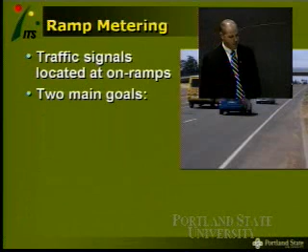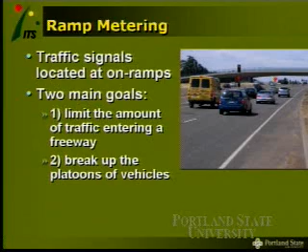So ramp meters, and for those on the web, the images, there we go. Ramp meters at their basic level are traffic signals at the end of freeway on-ramps. They have two main goals. One, to limit the amount of traffic entering the freeway, especially as the freeway nears capacity, to keep the freeway operating below capacity. And two, to break up platoons of vehicles as they're entering the freeway. Generally, if they've been discharged from an upstream traffic signal, the ramp meter intends to break up the platoons of vehicles to space out the vehicles entering the freeway.

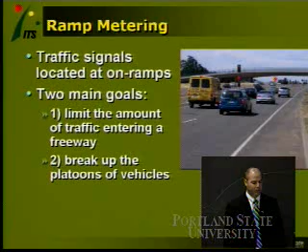This is an old operational strategy for improving the performance of freeways. Many studies have shown the potential for ramp metering to improve traffic flow, traffic safety, and air quality by reducing congestion and fuel consumption. It also has a side benefit of managing demand by discouraging short trips. If the appropriate ramps are metered, it will discourage short trips on the freeway, and people may take the arterial instead. So the freeway should be used at its capacity for longer trips.

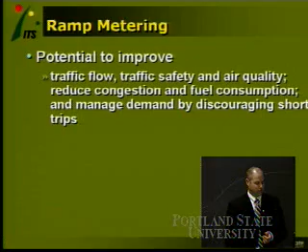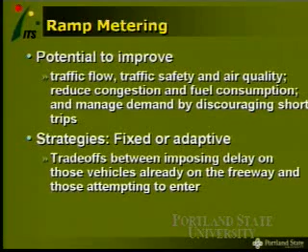There's a lot of work in optimal ramp metering strategies. They come in two kinds: fixed, where the metering rate, the amount of vehicles let on per time, is pre-decided by some historical pattern, so the timing is fixed and independent of the traffic conditions on the freeway. More modern systems are adaptive, meaning that when the meters come on and what rate they allow vehicles to enter can change depending on freeway conditions. So if it's a weekday with light traffic, the meters may not come on until later, and then they may meter at a higher rate, allowing more vehicles onto the freeway.

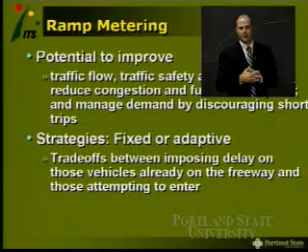So any ramp metering strategy really is a trade-off between imposing delay on vehicles trying to enter the freeway and those vehicles on the freeway. If you make the metering restrictive, you're going to build large queues at the on-ramps and impose delays on those vehicles while keeping the main line with less delay. If you allow more vehicles onto the freeway, eventually it's going to cause congestion and impose more delay on the main line. You're also usually limited by how much ramp storage you have. A particular ramp may only hold so many cars in queue before it backs up into the arterial system and causes other problems. So it's a balancing act between those three parameters.

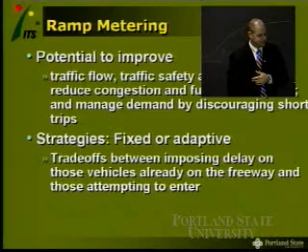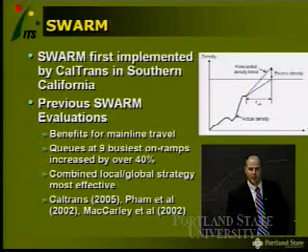Ramp metering started in Oregon in about the 1980s. It has been a fixed-time or pre-timed system until relatively recently, which was the focus of this project. They elected to implement an algorithm called SWARM, the System-Wide Adaptive Ramp Metering, an algorithm implemented by Caltrans in Southern California. The Caltrans evaluations have been in-house and not that extensive. They found benefits for mainline travel, but they also found that the SWARM algorithm was fairly restrictive, and the queues at the busiest on-ramps increased by 40%.

The SWARM algorithm competes between local optimal metering at the ramp and metering looking over the corridor in a more global sense. So it's evaluating which metering is appropriate based on local conditions, but also on the freeway conditions, and then it selects the appropriate metering rate.

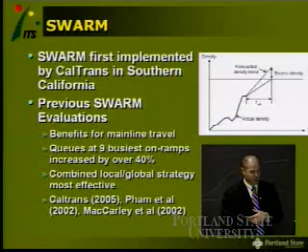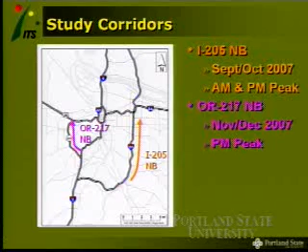So in our study, we conducted a pilot study on Oregon 217 southbound, which helped us set up the parameters for the remaining study. I'm going to talk today about the 3 other corridors that we evaluated in the full-scale study. So we looked at I-205 northbound in September, October 2007, and we looked both in the morning peak and

the PM peak. And we looked from the Gladstone on-ramp, which is down here, to the Division exit. So that was the extent of our evaluation on 205. And then on 217, we looked along the whole corridor, but we only looked in the afternoon.

So our approach was they ran the meters for 2 weeks in the fixed time or the pre-time mode. We were collecting data all the time through Portal, which is our regional transportation data archive. So everything that was happening on the mainline freeways by the detectors was being archived there. Then they switched over and ran the meters for 2 weeks in the swarm mode. So we went through the data pretty thoroughly, looking for data quality, weather, and incidents, and I'll show which days ended up being excluded from our analysis on the next slide.

The last bullet was our attempt. When we had done the pilot study, we had analyzed the ramp queues with video. And so there were a number of students that spent a lot of time watching video for the ramps. And we did it, but it was time-consuming and labor-intensive.

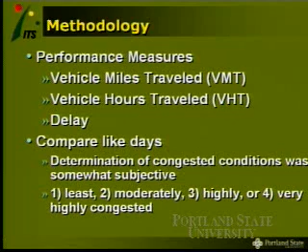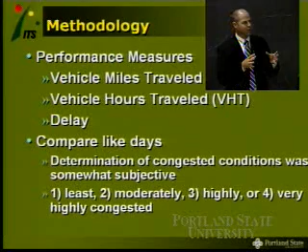So for the performance measures, we looked at the traditional performance measures, VMT, vehicle miles traveled, vehicle hours traveled, and then the primary focus measure that we were looking at was delay. Although we didn't have a large sample, we had 10 days before and 10 days after, we wanted to break the days down and look at how the swarm ramp metering algorithm performed on similar congested days.

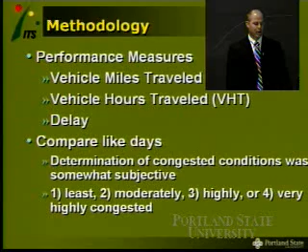So it was subjective, we had a set of criteria that we were using to try and determine how we would classify the corridor, both in time and in space, as congested. And we ended up coming up with these 4 categories of either least, moderately, highly, or very highly congested. And then we looked at the performance of the ramp metering overall in the corridor and on those 4 classifications of the congestion.

So this is just a snapshot of the heart of the analysis data that we used. Again, this is from the Portal Data Archive, and on the x-axis is time from about 5 in the morning to about 8 o'clock at night. The y-axis is distance, so travel is from the bottom of the graph to the top. And the colors indicate the average speed readings from each of these detectors across all lanes.

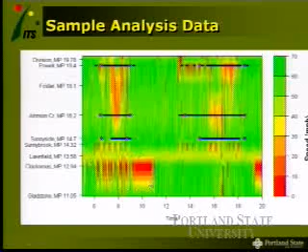So the red speeds are low speeds, green is higher speeds. And this kind of summarizes the data that we used in the analysis. You can see here that this is probably not congestion. This is definitely data quality issues. So when the detectors are reporting low speeds over these large blocks, those were data quality issues.

These other points on the graphic, the purple dots, are the fixed time start times of the ramp meters. So at 3 ramps, we were able to deploy those programmable logic controllers. So at Sunnyside, Johnson Creek, and Powell, we were able to have those devices out there. The purple dots are when the ramp meter came on during the fixed time, and the blue line is when the ramp meter came on during the adaptive time.

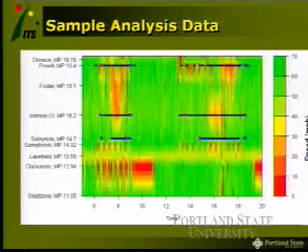So at Sunnyside, in the pre-timed, it came on right at about 6:30. But on this particular day, the adaptive ramp meter didn't come on until much later, about 7 o'clock. And it stayed on longer than it would have in the fixed time. And conversely here, it came on earlier than it would have on the fixed time. So the purple dots are the pre-timed or fixed time, and the blue lines are the adaptive. So that's just a quick summary, a good picture of the data we used in the analysis.

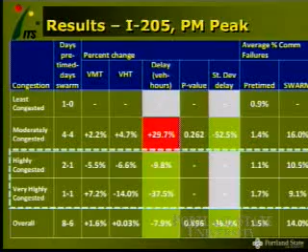So even though the overall corridor had an 8% improvement in delay, the moderately congested time periods, where you would expect ramp metering to have the most positive effect, we actually observed a 30% increase in delay. We did a t-test of means, but because the delay was so variable and the sample so small, only one of the tests in all of these days came out as significant. So dividing the days up into congestion level was more informative and for diagnostics than necessarily route comparison. In the highly congested and very highly congested, in retrospect, we probably should have combined those two. But in this case, the swarm algorithm did better than the pre-time period.

So I don't know why the graphic color is a little distorted. On my screen, everything's red, yellow, green. I guess yellow becomes orange on these projectors.

But this graphic shows, and the legend is cut off, so this is the change in vehicle hours. So this is the change in delay from the pre-time to the swarm period. So the dark red areas are where in space and time the delay on the corridor was worse in the swarm period.

The lighter colors, the green colors, is where the delay was improved in the swarm period. So we use this here to diagnose where in space and time the improvements were. So instead of just looking at the overall corridor, there was an 8% increase and 8% decrease in delay. Where was that decrease?

And so just highlighting these two areas, this is where the swarm did worse than the pre-time. So we wanted to kind of zoom in to this area. And we also made these plots for each of the various congestion levels. And again, it's the same.

For the moderately congested, where there was a 30% increase in delay, down at the beginning of the corridor at the Clackamas Lawnfield detectors, you can see that's where a large chunk of the increase in delay comes. And there was also a little slice here at the Sunnyside, Foster, Johnson Creek area between about 3:30 and 4.

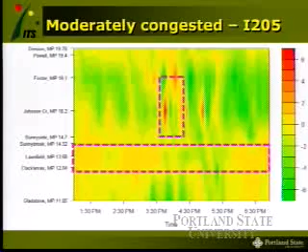So the Clackamas area, we did some diagnostics like this that I'll walk through. And for that ramp metering station, the conclusions are about the same as we came from this one. So the question was, why worse? Why did the swarm ramp metering algorithm perform worse than the fixed time?

So these plots, the pre-time condition are for the three stations, Sunnyside, Johnson Creek, and Foster, and they're on the top row. So the top row is the pre-time condition. The bottom row is the same three stations for comparable congested days. So there are three lines and two vertical lines on each graph except for the Foster swarm station.

The yellow line, this top line, is the observed mainline speed, and it's read off the secondary y-axis, so it goes from 0 to 60 miles an hour. The blue line and the red line are read off the y-axis, and it goes from 0 to 5,000. It's the flow rate in vehicles per hour. The blue line is the mainline flow, and the red line is the metered flow.

So in the Portal Data Archive, for the vehicles passing downstream of the signal, there's a set of detectors, so we were able to measure the flow, the number of vehicles entering the freeway. The vertical lines on each of the plots are the meter on and meter off times. So the vertical lines are the time the meters came on, and then this is when the meter came off. So at Johnson Creek and Sunnyside, they came on and went off. Those are the fixed time.

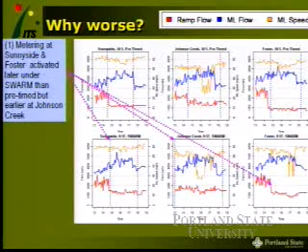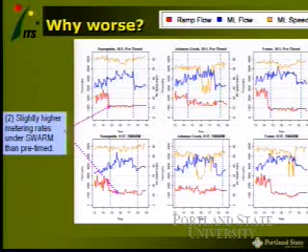So why worse? At Sunnyside and Foster, if you compare that to the pre-time, the meters actually came on later in the swarm condition than they did in the pre-timed. At Johnson Creek, swarm came on earlier than pre-timed. And Dave, this goes to the ramp information. In all cases, we observed, despite what Caltrans found, that they found increases in the ramp queues.

When ODOT implemented the swarm algorithm, they sort of capped it; they didn't want it to be that restrictive. So in all cases that we observed, in the pilot study where we had the video detection, and in all areas that we looked at, the swarm algorithm actually lets more vehicles on the freeway than the pre-time situation. We can look at the VMT, sort of the overall demand, and we did it 2 weeks before and 2 weeks after, and we assume that the ramp demand probably didn't change because the mainline demand didn't change very much.

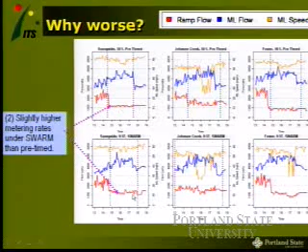We can conclude, but not conclusively say, that the ramp delay had to decrease because more vehicles were getting on the freeway than in the pre-time situation. But in all cases, and I should have overlaid these two for you, if you look at where this is at here and up here, it's slightly higher. The swarm algorithm always allowed more vehicles on the freeway than the pre-time situation.

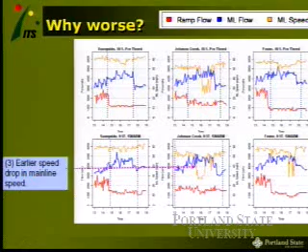And just looking at this graph here, this is Johnson Creek Station, you can see that in the swarm period, the drop in the mainline speed occurred earlier and for a longer duration than it did in the pre-time situation. And granted, this is just one snapshot, but these are sort of the diagnostic tools we were looking at. The peak mainline flow is about that time where you saw the delay space-time change, right where the mainline flow peaks, where swarm is letting more vehicles on the freeway, is sort of where we saw that increase in delay in the time-space window.

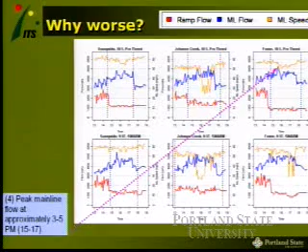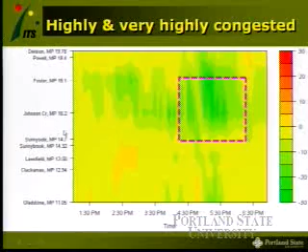So looking at the performance, the highly and very highly congested days where swarm seemed to perform a little bit better than the pre-time situation, doing that same type of diagnostic here, the green areas are in those same stations, Foster, Johnson Creek, Sunnyside, where a big chunk of the improvement occurred. So let's take a look at those. This is the same plot, same three stations, pre-timed across the top, swarm on the bottom.

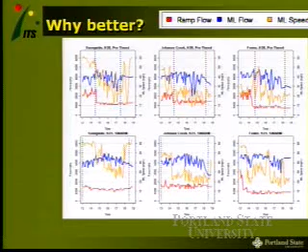And here in this situation, you can see that the adaptive ramp metering system came on at 1 o'clock. That was the earliest ODOT would allow the ramp metering to start. And in this case, on these highly congested days, the ramp metering timing came on at 1 o'clock. At the pre-timed, it's not coming on until 1:30, 2 o'clock, depending on the station. And you can see here that the mainline speeds in the pre-time situation on these very highly congested days drop well before the meters even come on. So the mainline condition has gotten worse before the meters have even come on.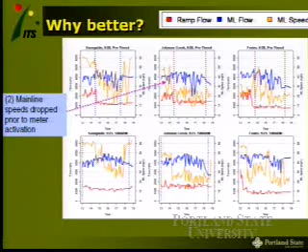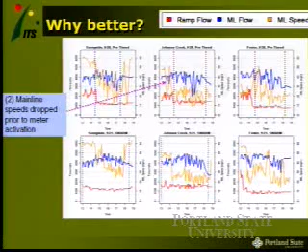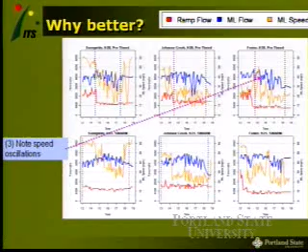But in the swarm situation, the meters were able to start at 1 o'clock. And even though they were allowing more vehicles on, they were able to sort of manage the delay a little bit better because they started earlier. The other thing to look at is, and again, this is just one snapshot from one station from one day, but if you look at the speed information across the top, you see how much more variable that is, the oscillations in the speed, whereas the swarm is a little bit more dampened and a little bit more smooth. That goes to the standard deviation of delay, where we saw an improvement in the variability of the speed or delay or travel time, whichever one you want to look at.

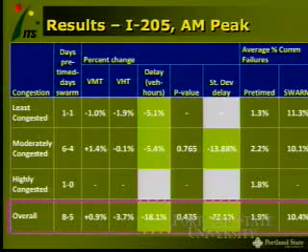So looking at the morning, swarm on 205 did across the board better in all congested conditions, and overall had an improvement of about 20% in delay and an improvement in the standard deviation of delay. And again, just looking at the map where this chunk is here, I'm not going to go through another one of those plots, but what we found

by looking at the diagnostics there was that in the pre-time situations, the meters went off, but there was still quite a bit of ramp demand, particularly at the Foster ramp. So you could see in the plots where the meters went off in the pre-time situation and this big surge of vehicles came on, and you saw a pretty significant jump in delay. But Swarm was able to keep the meters on until about 9:30 or 10 until that demand went away. And so at that particular station, the meters staying on longer actually improved the performance in the corridor.

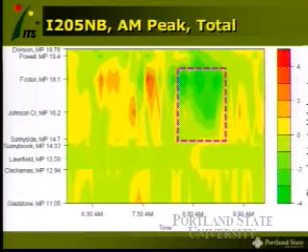So we sort of hypothesize or suspect that it's because, if you know the two freeway corridors, 217 is a narrower corridor, a narrower freeway, a little bit lower.

It's not design standard, but a little lower performance level than 205. But actually, 217 has higher per lane mainline flows than 205. There's actually less room for error on 217 than there is on 205. And with Swarm allowing more vehicles in all cases, and here particularly, that surge onto 217 where there's not as much room to give sort of produces this picture.

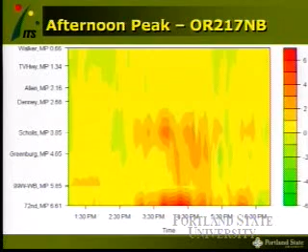So you could see that there was a pretty significant increase in the communication failures. So the way the Swarm algorithm works is that at the central traffic management center, every 20 seconds, from all 500 detectors, from each ramp metering station, it's polling: give me speed, count, and occupancy. And previously, in the pre-time situation, that was all the system had to do.

But now with Swarm running, it's also trying to send commands to change the ramp metering timing. And so this additional demand on the controllers that are running the ramp meter, and they're fairly old. They're 170 computers. They're not that snappy. And so with this additional workload, the communication failures end up being drops. And after we pointed this out, ODOT was able to look at the log, and they found lots of commands that had been waiting to be issued or collected from the ramp meter controllers, because there was an additional demand on the communication network.

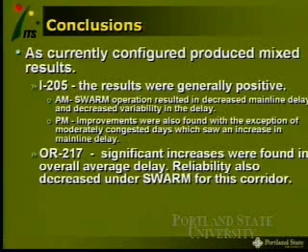So our conclusions, and this was an empirical observational evaluation of the Swarm algorithm as implemented with the parameters that ODOT implemented in the field. We felt that on 205 the results were generally positive, but on 217 the results weren't that good, and we were recommending they definitely need to look at how Swarm has implemented the parameters. It has a number of different parameters that can be tuned, and they need to look at those, including maybe not restricting the adaptive ramp metering to end at 9 and come on at 1, maybe let it run the whole day.

And I already mentioned that the change in performance, particularly on 217, was due to the higher metering rates and the different freeway volumes and lanes. And the communications failures were one of the findings of our evaluation. They weren't anticipating it. Now they're trying to make some fixes in the system. And it's also important because we use the freeway data for other traveler information programs and other evaluations, so missing large chunks of data could have other impacts. So they recognize that improving the communication so that there are fewer drops is a good maintenance strategy.

And also, it'd be very easy to evaluate this on an ongoing basis with the archive data, but we needed a few more pieces of information on a consistent basis. So one, it'd be nice to have those on-ramp counts at the top of the queue. They don't actually collect that information in the system now. So in the next rewrite of the TMOC software, including that information would allow you to measure on-ramp queues. Even though it failed in our data collection approach, we did a pilot test and it worked, and in theory it should work. It was the way the program collected the data.